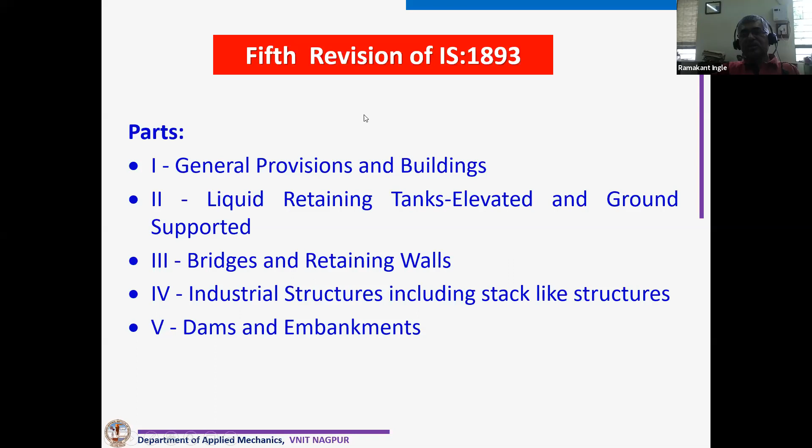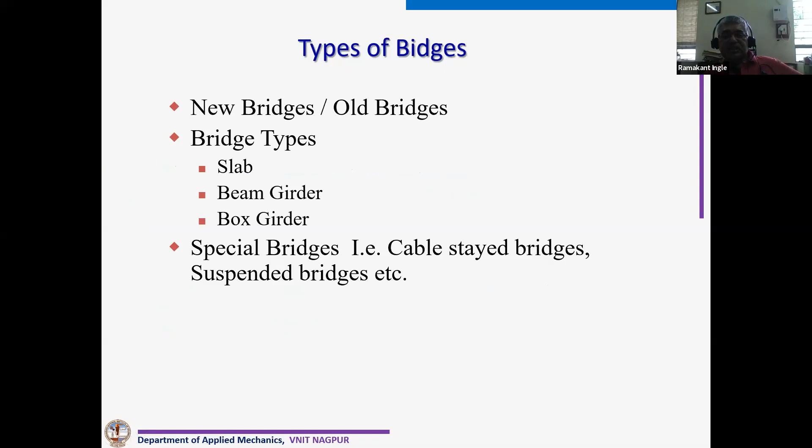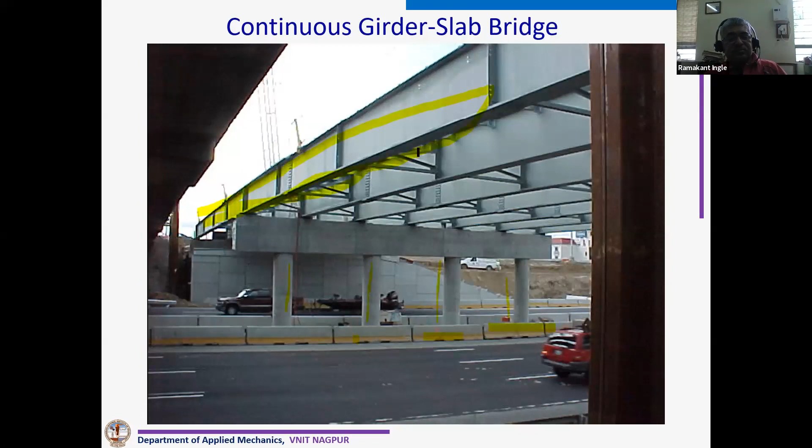Now you can see here also the girder is continuous. You can see here, continuous girder. Nowadays it is called an integral bridge also. The concept of an integral bridge is becoming more and more popular, because the more the indeterminacy, the better it is for earthquake resistance. You can see now here also, these are frames. The substructure is of frame type, and you can see the girder, they are continuous.

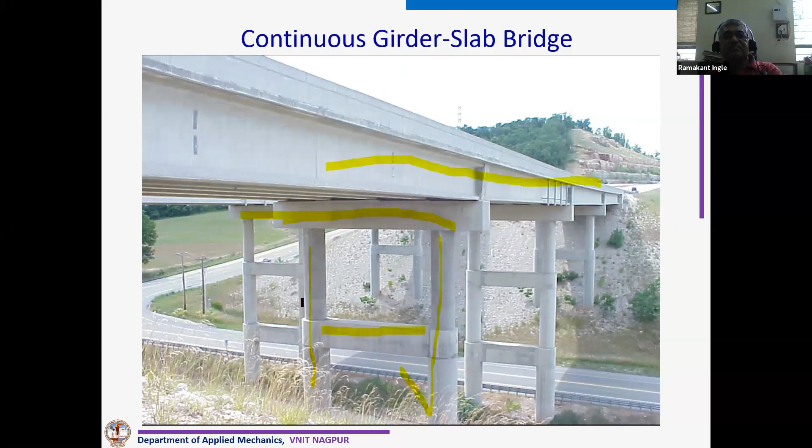Okay, you can see here. Now these are integral bridges. No bearings are required. Bearings, every 15-20 years, you have to replace them, and that itself is a big job. So now most of these developed countries, they are coming up with integral bridges, that is fully connected, rigid.

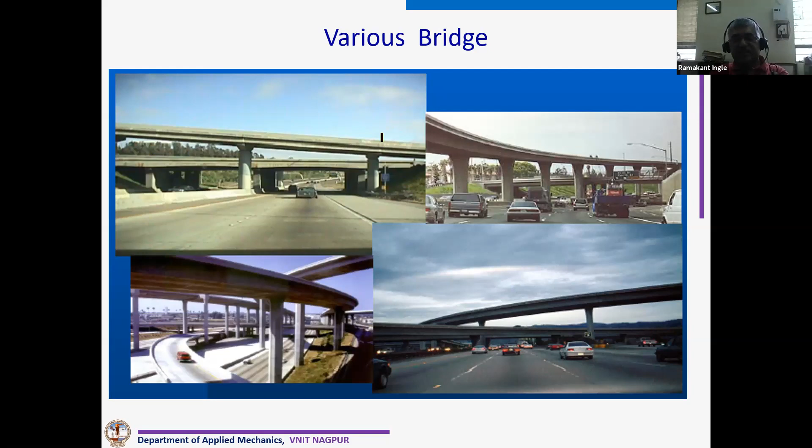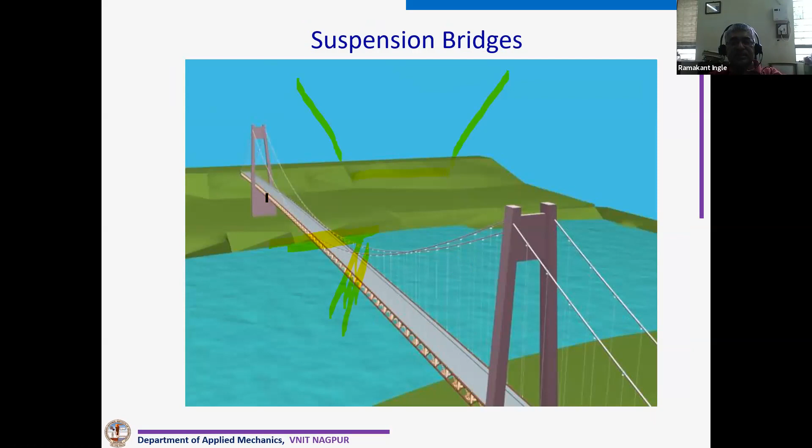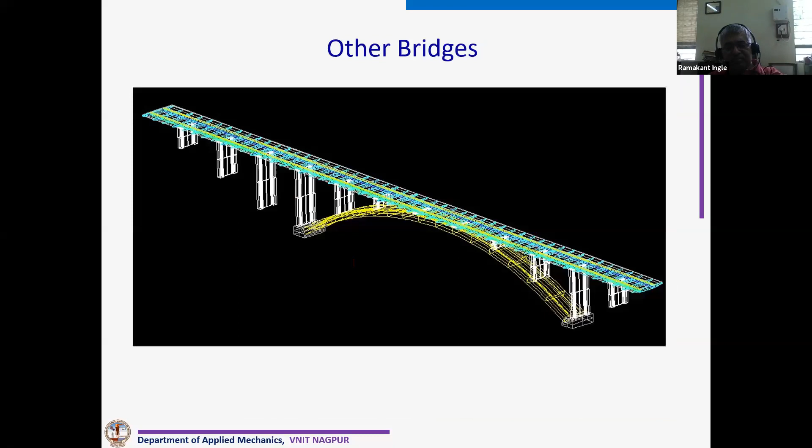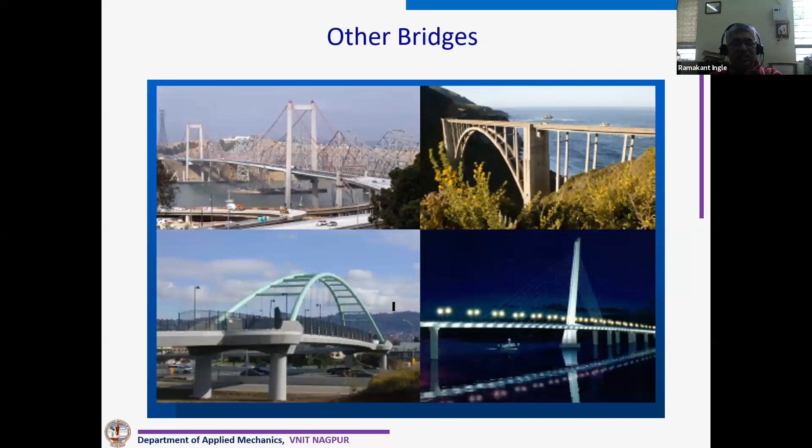This is another type of bridge. Again integral, and this is a FEM model of it. These are some other type, fancy type bridges. You can see here. It should look nice also. There should be a landmark in the city. And all these bridges.

Now, seismic analysis mainly demands 3D model of bridges. We can do dynamic analysis. We can go for elastic cracked section, even inelastic analysis also. In case of dynamic, we can go for response spectrum analysis as well as time history analysis. We have to combine various horizontal components, that is X and Y, as well as vertical components also.

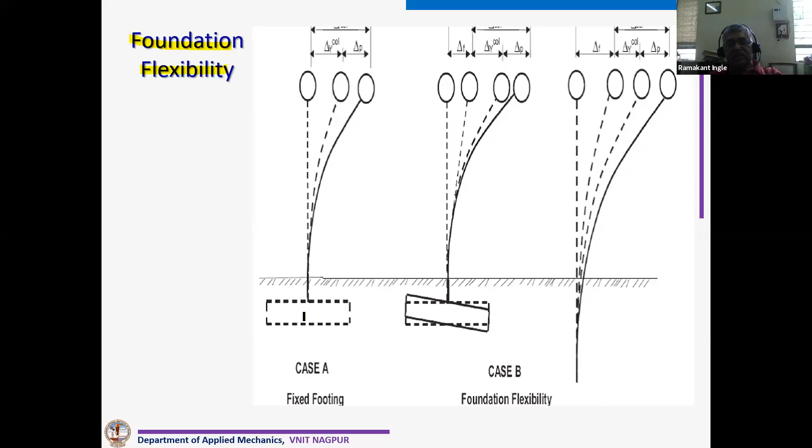You can see this, sky is the limit to prepare a mathematical model. In one model, what happens - we assume fixed base. And in another case, we can consider the flexibility of soil. You can see both results will be totally different.

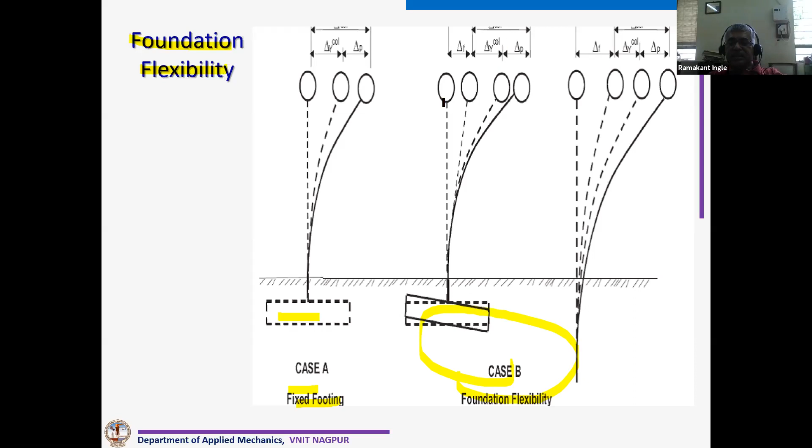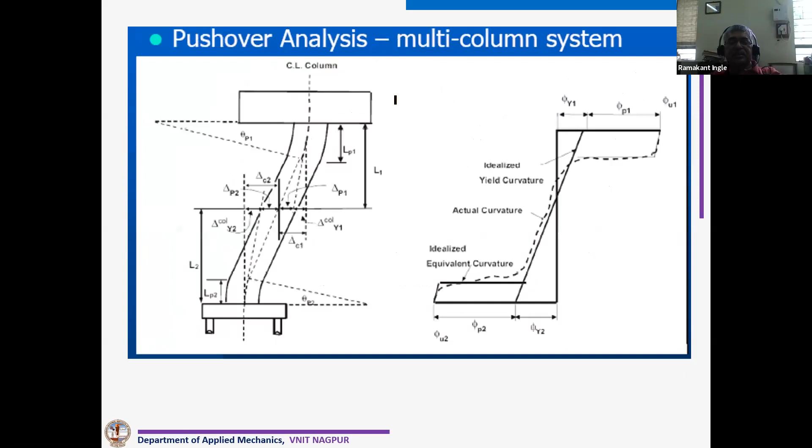Nowadays, this concept is coming up now - push-over analysis of bridges. So this means we are going for non-linear analysis. See, it is a push-over analysis for a cantilever type of bridge. This is for a portal type of bridge. The mathematical model shown using solid models.

See, this is a hollow pier. You can see this is a hollow pier. Then foundation, pile cap, then piles. You can see.

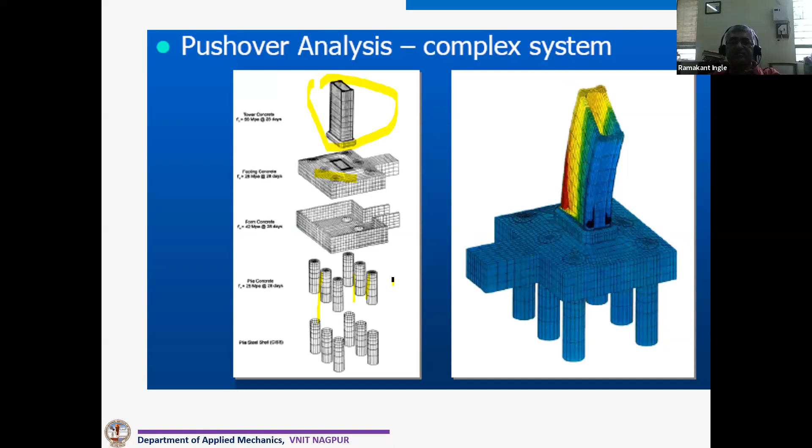Now, before going for this code, let's see what damage can occur to the bridge. You can see here, damage type - it can be brittle type, it can be ductile type. Brittle type means what? At this particular point, you will find there is a damage, and here also. Ductile you can see at this particular point.

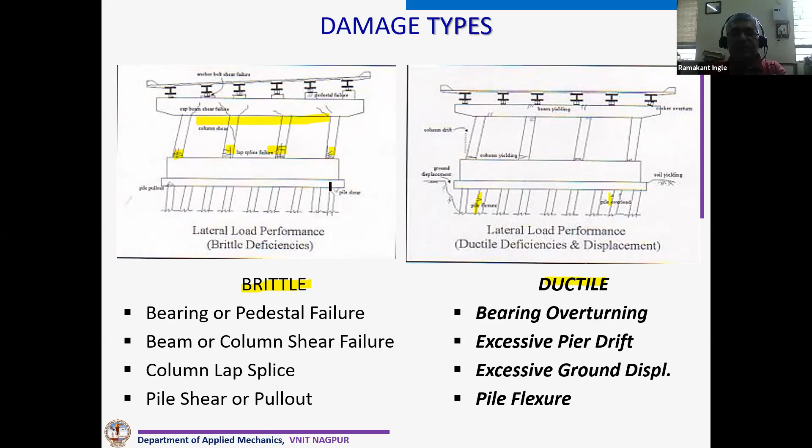You can see this is one bridge. Now this bridge damage has occurred because of fault. Then this is on the damage bridge. You can see the dislocation of this particular joint.

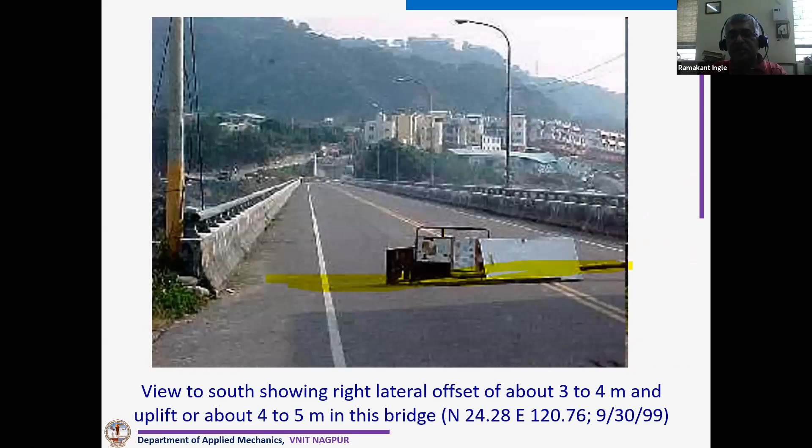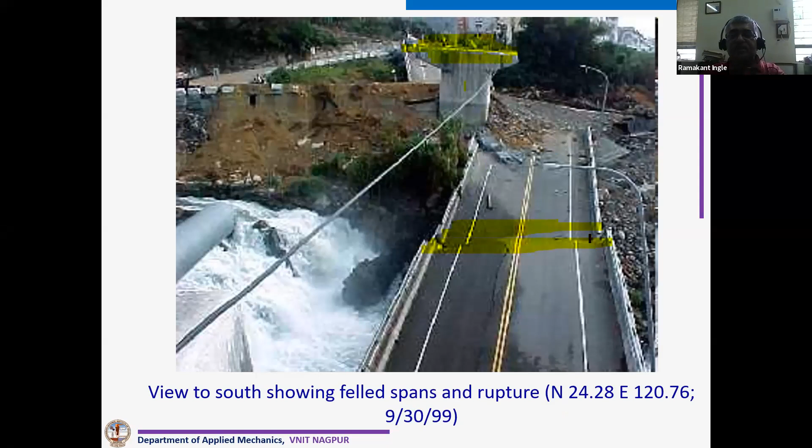Two span dislodged - no, not two span. See what happened, this was a superstructure, this is a pier cap. This has fallen down. You can see here, and it has cracked at this particular location. It is under view.

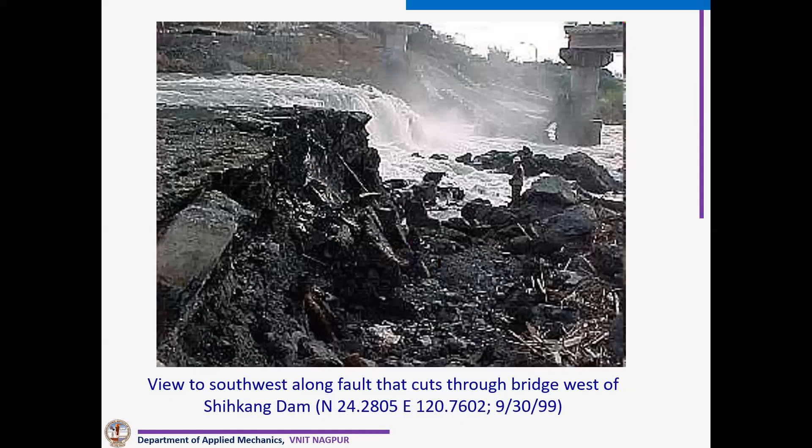You can see this also. A bridge has collapsed. See, here also you can see. Superstructure - see, it has not failed, it has dislodged.

You can see here also dislodging of the bridge. You can see here also. Dislodging, because what happens, this particular seating arrangement here was inadequate. So that's why when earthquake came in this direction like this, shaking, it moved like this. Since this particular seating was less, it has collapsed.

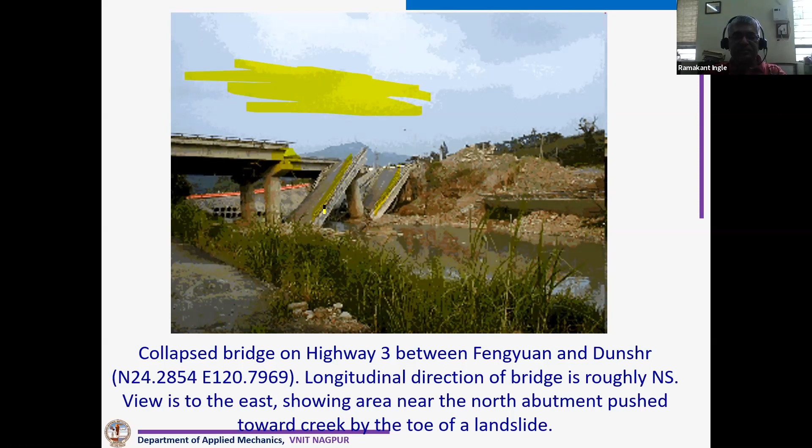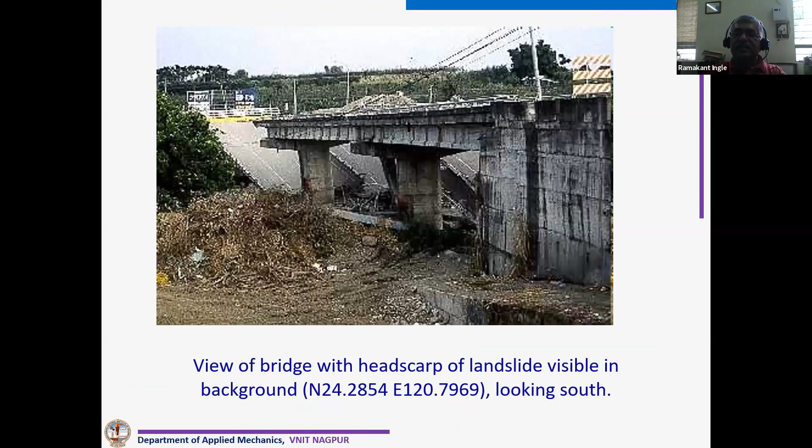You can see same thing here - seating was inadequate here also. You can see here also. So majority of bridges, they fail because of inadequate seating. Only a few, they fail because of substructure failure.

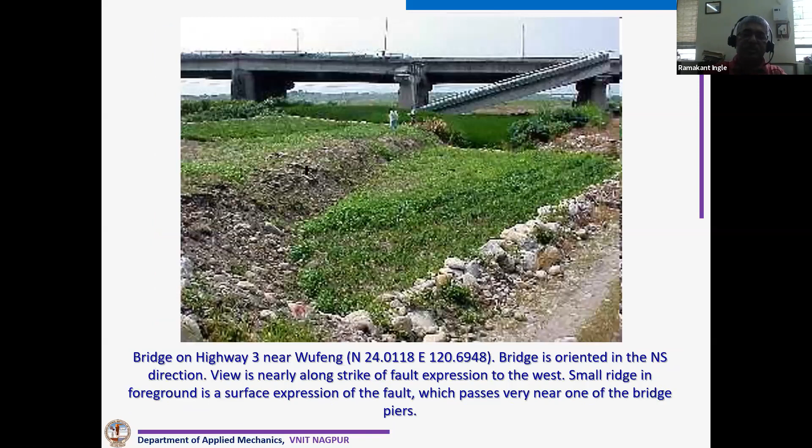You can see here now, it has tilted, maybe because of soil movement. You can see here. See what happened here - height was less, horizontal force might have got developed in this particular pier, so it has sheared off like this.

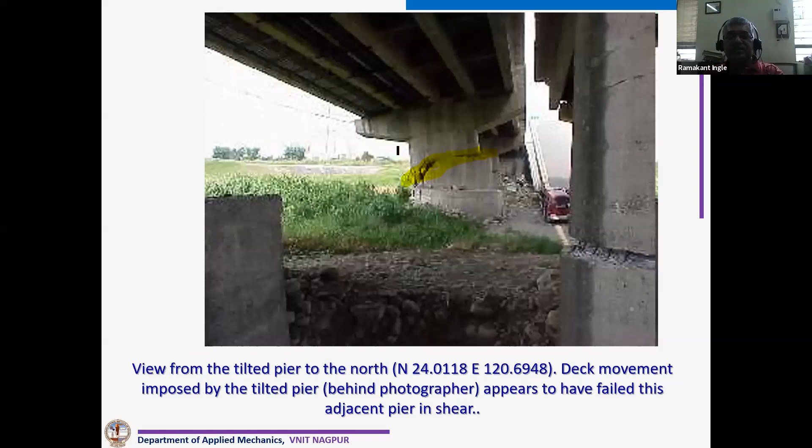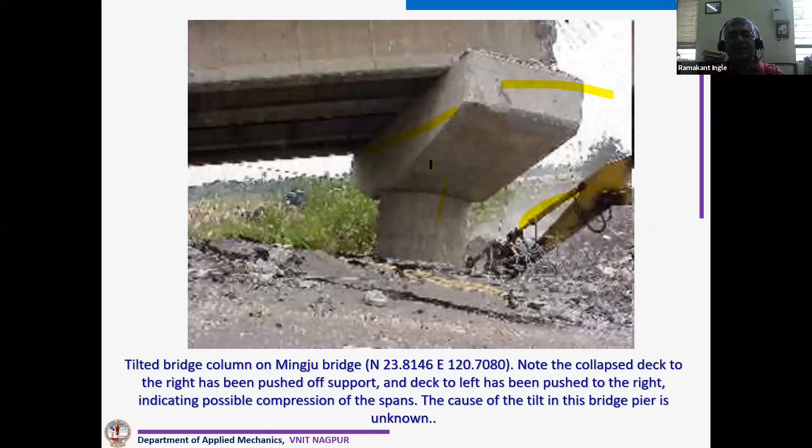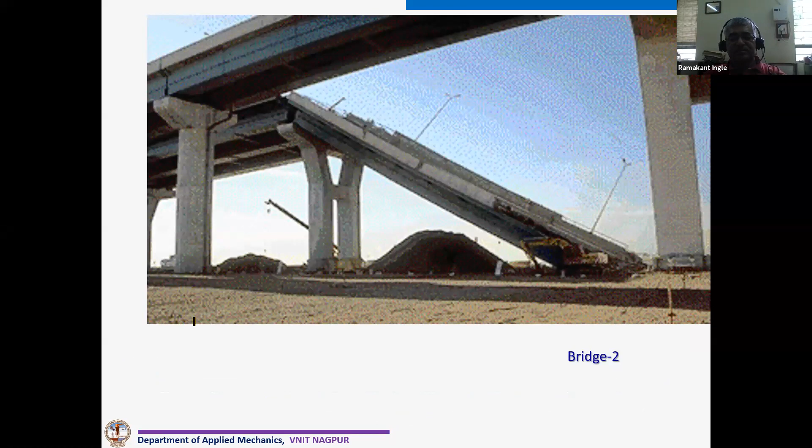You can see here again inadequate seating. See, majority of failures there because of inadequate seating and non-ductile reinforcement, placing of non-ductile reinforcement. You can see here also, nothing has happened to this. Now you can see this is a double decker. You can see this particular slab, the bottom one, has collapsed on this bridge. But still this particular bridge, you can see the top one, it is still intact.

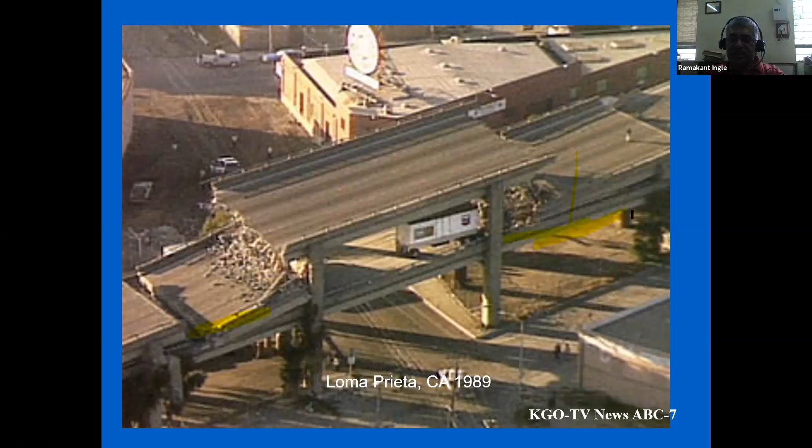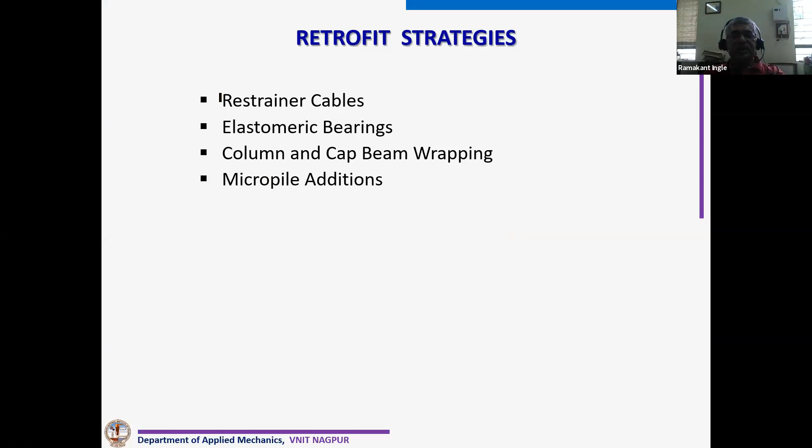There are different retrofit strategies which can be used, such as restrainer cables, elastomeric bearings, column and beam wrapping using steel fiber or carbon wrapping, and micropiles if we need to improve soil properties.

After these failures, let us try to understand what IS 1893 Part 3 is. It covers bridges and retaining walls, and gives the definition of regular bridge as well as irregular bridge.

What does a regular bridge mean? There should be no abrupt or unusual change in stiffness, mass, or geometry along the span. A bridge shall be considered regular if it is straight, the adjacent piers do not differ in stiffness by more than 25%, the spans are less than 120 meters, and the pier height is less than 30 meters.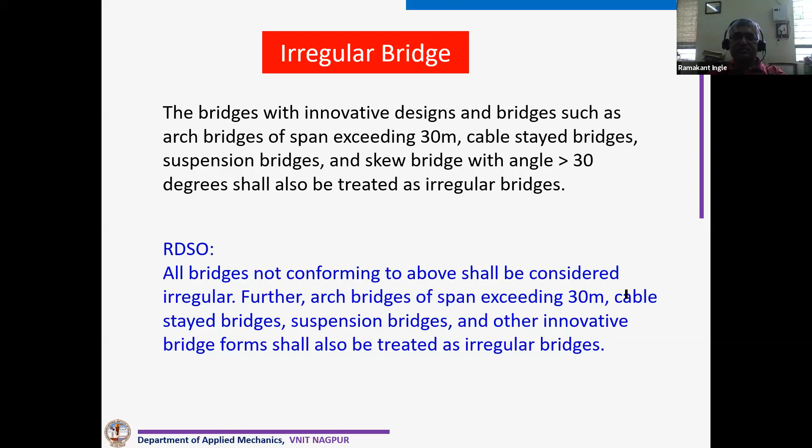This is the irregular bridge. If we cannot qualify a bridge as regular, it will be called irregular. So all other types of bridges are irregular. We have to define our bridges as regular or irregular because based on that, our analysis methodology is decided.

There can be components like superstructure, substructure, bearing, and foundation. Masonry and plain arch bridges which span more than 10 meters are not recommended in zone 4 and 5.

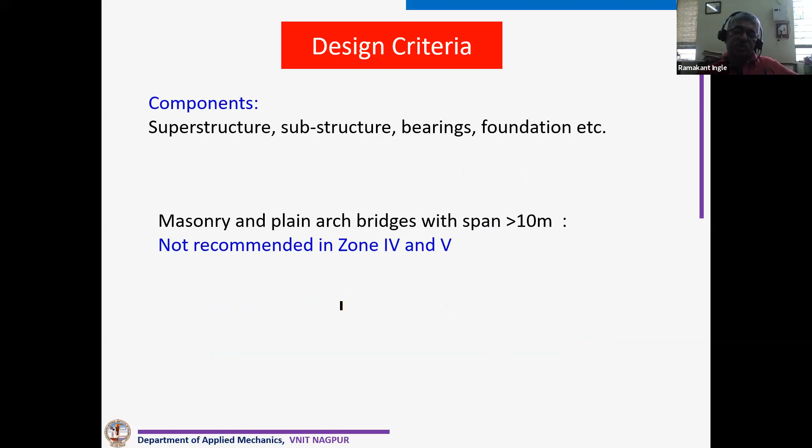We can use site specific spectra also. We can go for elastomeric bearing, but with the condition that our R value will be 1 for design of foundation, as you can see.

Bearing shall be tested for cyclic loading.

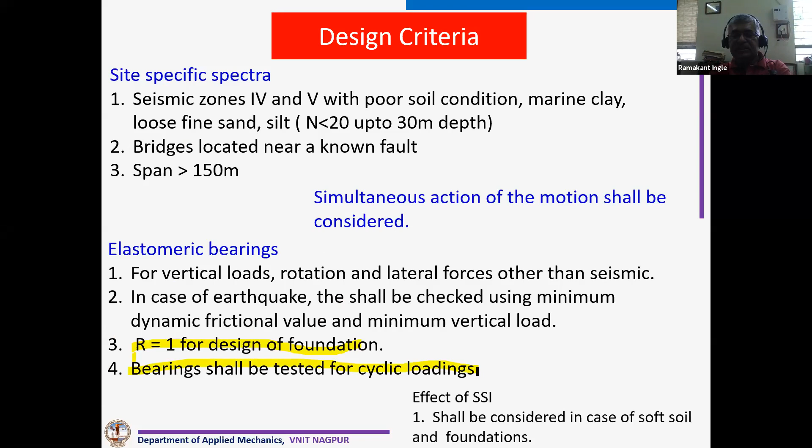Then there is interlinking of bridges. Why this interlinking? Because if you do interlinking, the dislodging of superstructure that has occurred can be avoided. Even nowadays there is a growing demand to go for deck continuity bridges.

What do deck continuity bridges mean? Decks are continuous and the beams below are simply supported. Because decks are continuous, we can avoid at least the part which requires regular maintenance, that is expansion joints, but we cannot avoid bearings, because it is simply supported.

So that is also coming up nowadays, and more so integral bridges are taking advantage now in case of seismic analysis. Capacity design is allowed for bridges in seismic zone 3 and above, especially for substructure.

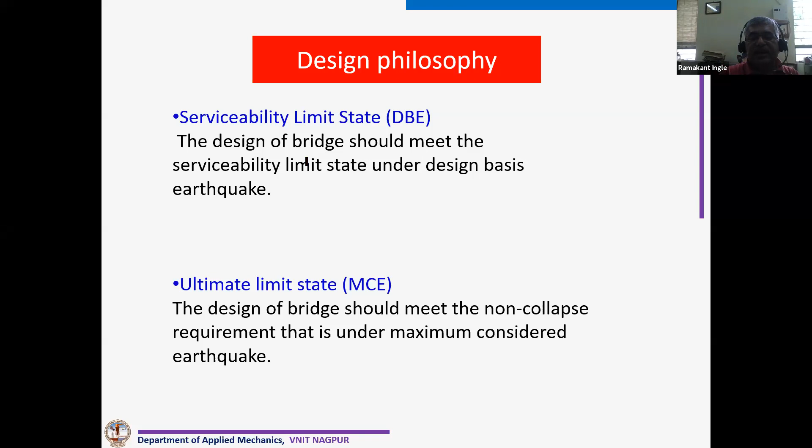This is on the assumptions while doing the earthquake analysis. See one thing here: this is the main assumption. Seismic forces on live load shall not be considered in the longitudinal direction.

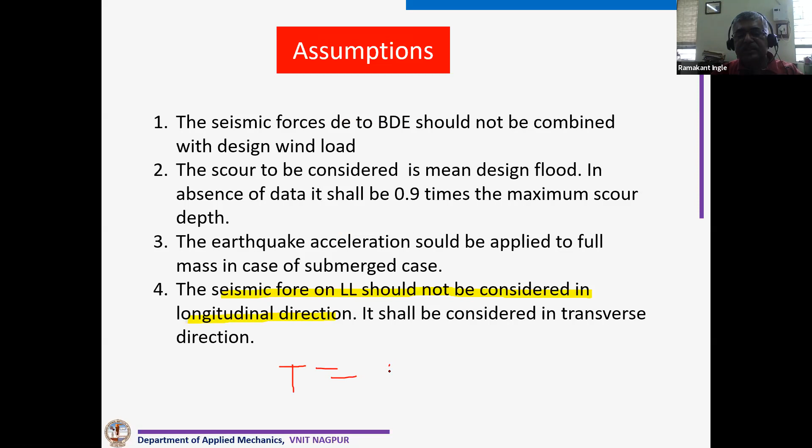That means, generally, we calculate the time period assuming it is a single degree of freedom system, and that is calculated by this particular expression: time period is equal to 2 pi root of m by k. Now, while evaluating this mass, the code says we can ignore the live load in the longitudinal direction.

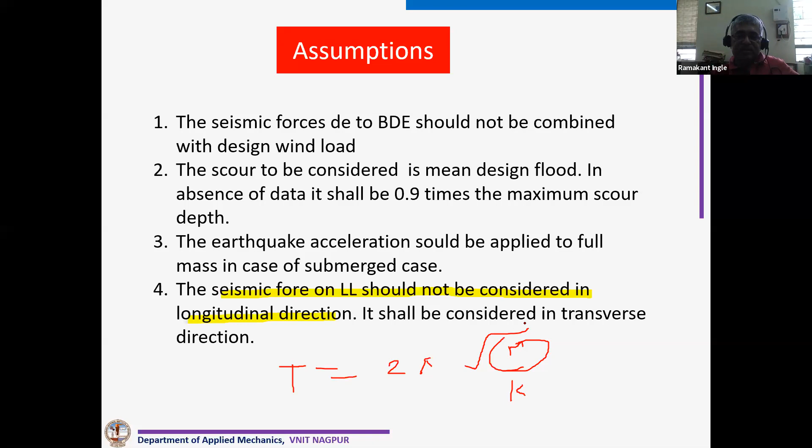But when we do earthquake analysis in the transverse direction, we have to take some part of the live load. We calculate seismic force as per that seismic weight, which is the weight of the superstructure, and some part of the substructure also we have to take, and live load is taken as 20%.

But it is 0% for rural roads and 30% for rail bridges. For road bridges we take live load in seismic weight calculation in the transverse direction as 20%, 0% for rural bridges, and 30% for rail bridges.

Even RDSO gives a similar provision, but it says 50% of live load. Even vertical seismic force shall also be calculated with 50% of live load.

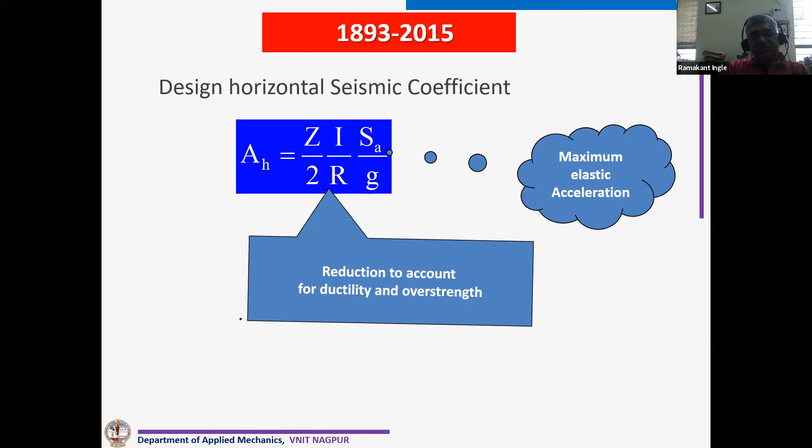Now we calculate seismic force, seismic acceleration using this expression: AH is equal to Z by 2, I by R, SA by G, where Z is seismic zone factor, I is importance factor, R is response reduction factor, and SA by G depends on the time period. So this is for different zones, we have different Z values.

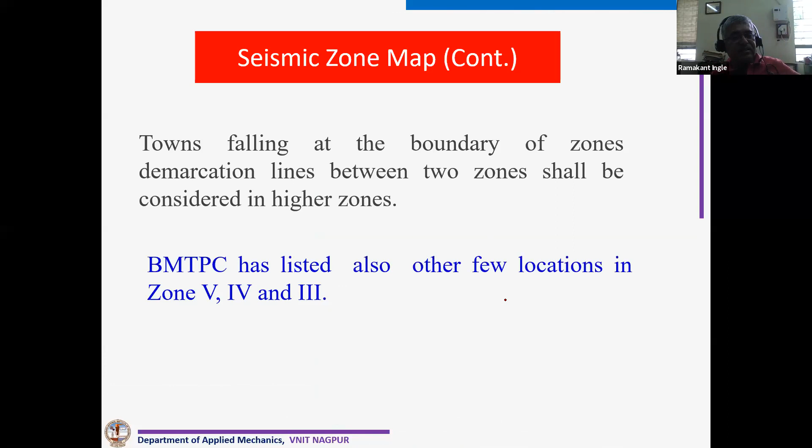At the boundary, we have to take the higher zone, but sometimes it is still very difficult to locate our bridge on the zone map. So BMTPC has given direct locations. You can see, I'm just putting it for Maharashtra now.

Zone 4 includes Kolhapur, Pune, Raigad, Ratnagiri, Sangli and Satara. Then Chandrapur, Gadchiroli, Mumbai, Thane, Yavatmal, Ahmednagar, Akola, Amravati, Aurangabad come under Zone 3, and others fall in Zone 2.

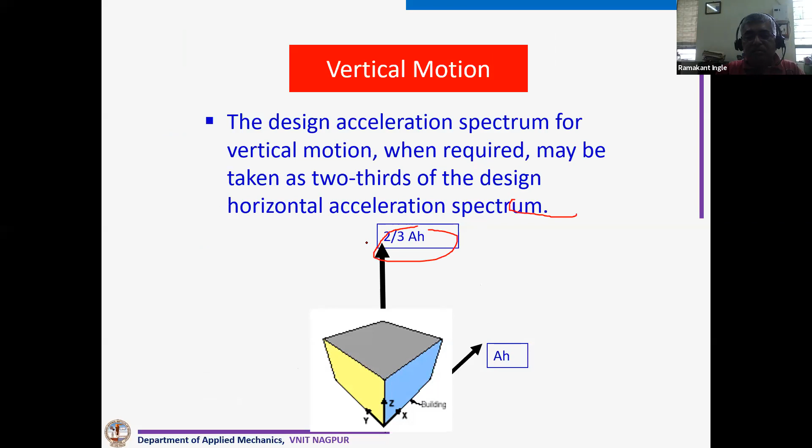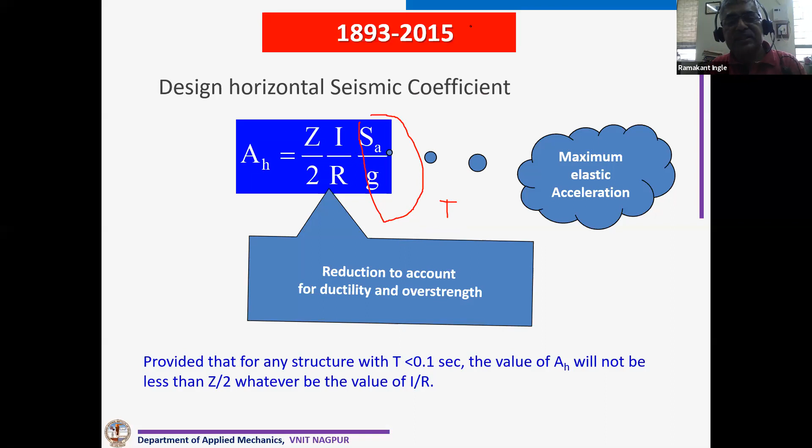For seismic action in the vertical direction, the code recommends taking two-thirds of the horizontal AH. But this AH is based on time period. While calculating AH for the vertical direction, it should be taken as zero because the vertical direction time period is always close to rigid action. So we have to make sure of that.

Then we have to combine the earthquake forces also. We calculate earthquake force in the longitudinal direction, in the transverse direction, and in the vertical direction, and then the responses are combined.

Now I will give an example of how to combine it. Let's say this is a pier, and at this particular point we have to do the design. Here we get forces because of dead load, SIDL, live load, and earthquake. Now suppose earthquake forces are obtained in the longitudinal direction, transverse direction, and vertical direction. Now, how to combine them?

Let's say we are interested in calculating the moment Mx here. So what we normally do: these load factors are given by IRC or IRS codes. But how to combine these earthquake forces? We take the major direction earthquake first, 100% of Mx when earthquake is in the X direction, plus 30% of Mx when earthquake is in the Y direction. Then a second time we reverse it: 30% of Mx because of X direction earthquake, and 100% of Mx because of transverse direction earthquake.

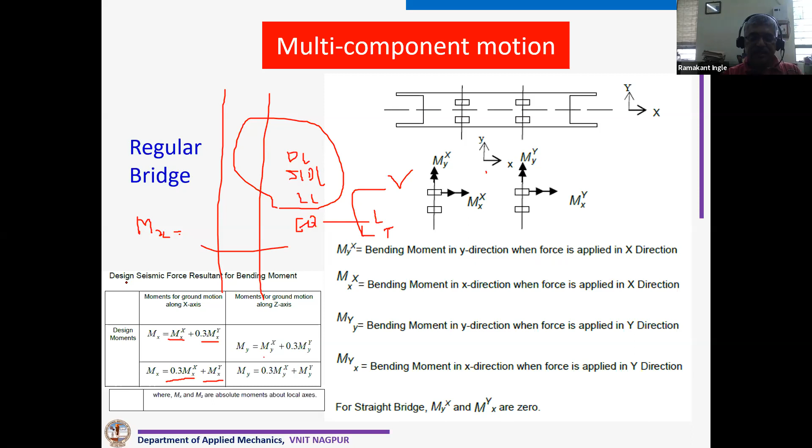So this is for Mx. The same thing has to be done for vertical loads, horizontal shears, and other moments also. So like that we have to combine all these moment responses. Even for regular bridges, we have to take all three components: X direction, Y direction, and Z direction.

This is our spectra, as given. This is our simple pier, foundation, mass, and we get the time period from this. Sometimes it is better to model differently because every time you will not get a uniform pier. There is a possibility it is a step pier like this, a tapered pier like this, or sometimes piers are like this also.

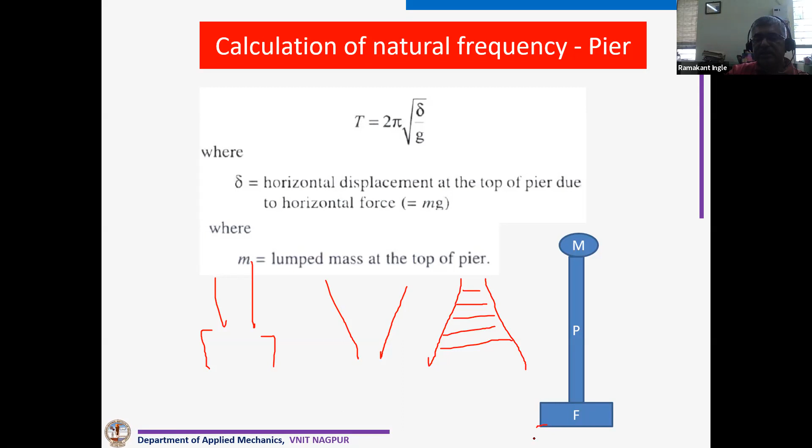So you can do this in a simple computer program also, making a mathematical model and lumping the mass at the top. Divide the column also into a number of small elements, so that its self mass is taken automatically by the software, and you do the analysis. Even in this case, it is very easy to take foundation flexibility also into account. So it is not that every time we should go for a very simple mathematical model.

Even we have to do earthquake analysis in the vertical direction. You can see now, this is a frequency in the vertical direction. It is generally recommended now in Eurocode that this frequency has to be more than 100 by span, where span is in meters. For example, if our span is 30 meters, whatever frequency we are calculating for this beam in the vertical direction, it should be more than 100 by span, that is 3.33 hertz. Otherwise, the code suggests that we have to go for detailed dynamic analysis; we cannot go for simple static analysis.

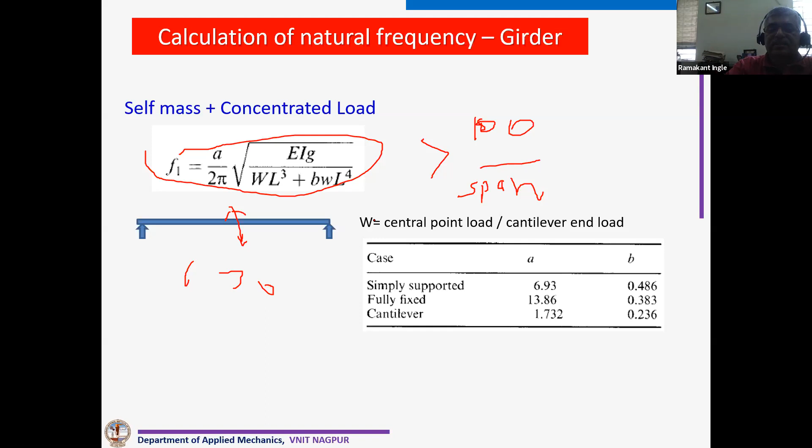These are the formulas given for calculation of frequency. A very simple formula: it is 18 by root delta, where delta is in mm. This is when W is zero. Now in this case we can have anything, even a fixed beam also, or a propped cantilever also. We just have to calculate displacement in mm. 18 by root of that displacement gives the frequency.

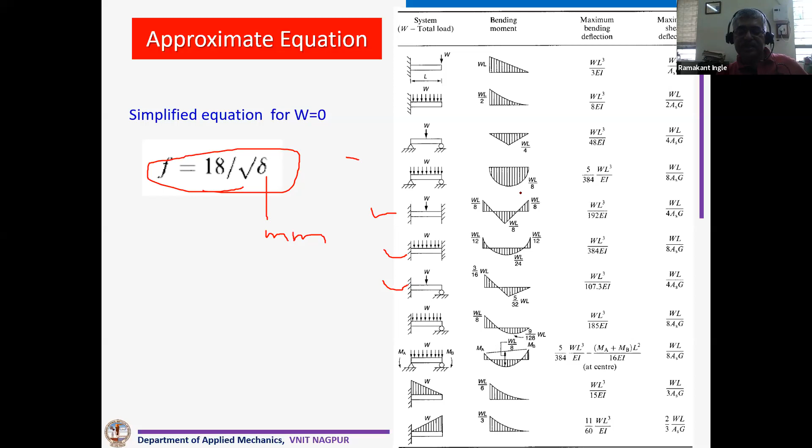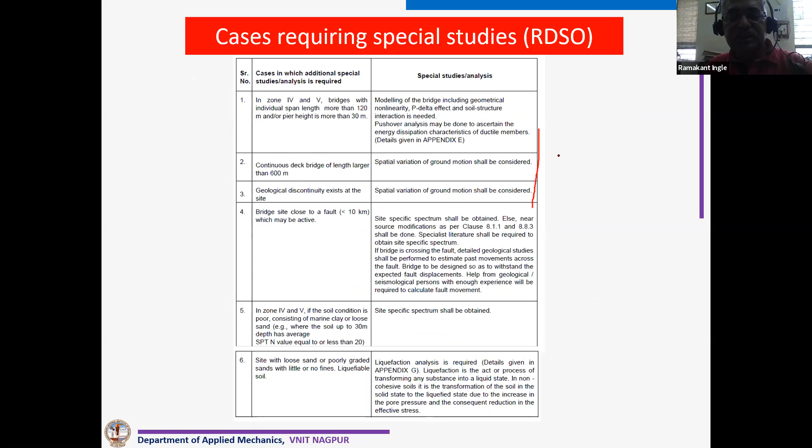In case we have to use maximum credible earthquake, then we have to go for nonlinear analysis or time history analysis, even for regular bridges also. So even RDSO has given, depending on the zone, how to perform the analysis. Everything is given, I will not go into detail of this one. Even they have given what is seismically preferred and what is seismically non-preferred also.

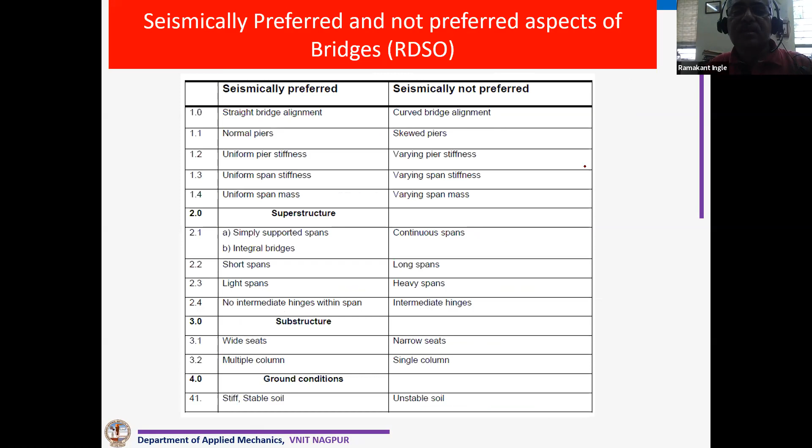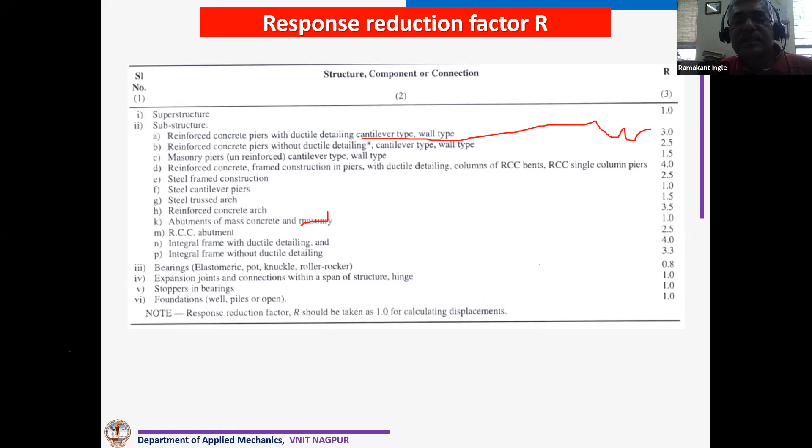This is response reduction factor, given in IS 1893 part 3, depending on cases. Now you can see here a cantilever beam, a cantilever type, wall type - R factor is 3. Just see here, integral bridges with ductile detailing - R factor is 4. That means we are designing our structure for one third less earthquake force, 25% less earthquake force.

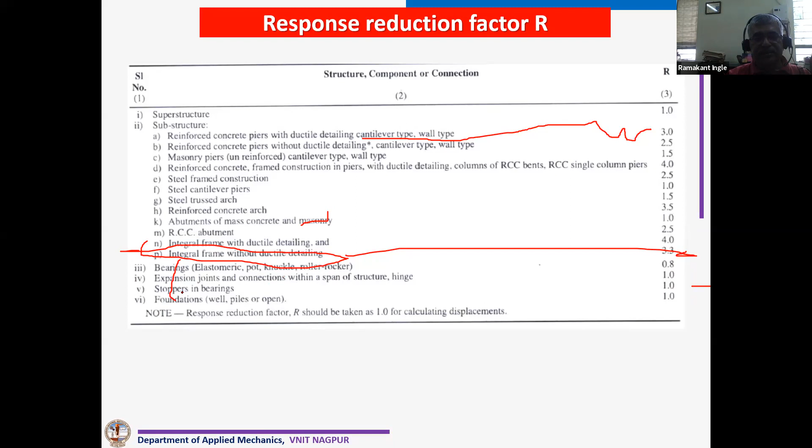But you can see how we have to design the bearings - for bearing R factor is 0.8. For design of stopper, R factor is 1. For designing foundation, R factor is 1. For designing expansion joints, connection within span, R is equal to 1. So we have to keep in mind all these things. For superstructure, R is equal to 1. Only for substructure where ductile detailing can be provided, we say that R will be more than 1. This is response reduction factor given for RDSO bridges.

You can see here masonry or PCC piers - it is very less, as compared to RCC column with ductile detailing as well. Without ductile detailing it is 2.5. So that's why it is always better to go for ductile detailing, so that our response reduction factor is high and we can reduce - we are designing for less earthquake forces because this ductility can absorb more earthquake forces. For connection and stopper, again R value we have to take as 1.

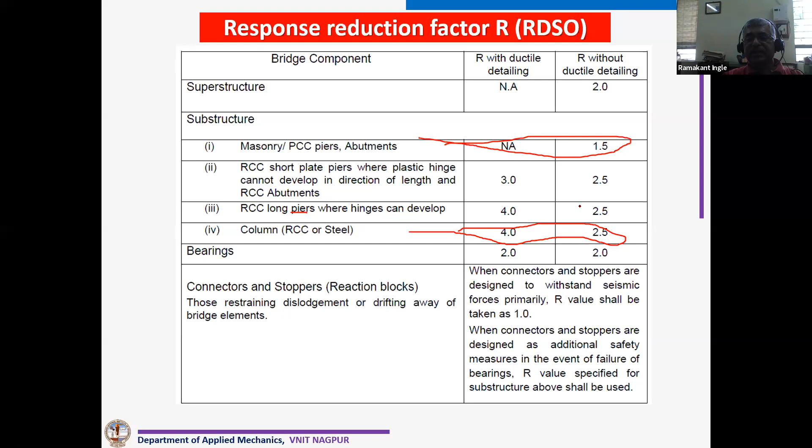But there is another thing about soft soil - no permissible increase is allowed in case of soft strata. Soft strata means where N is less than 10, and clay type of soils.

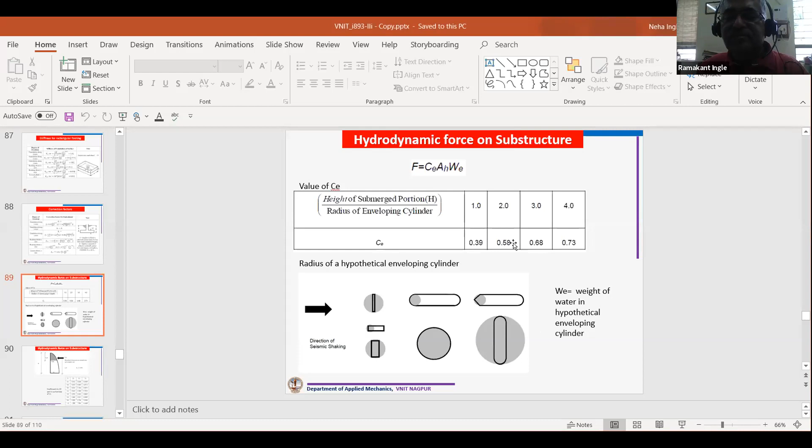See, soil structure interaction, generally it is done.

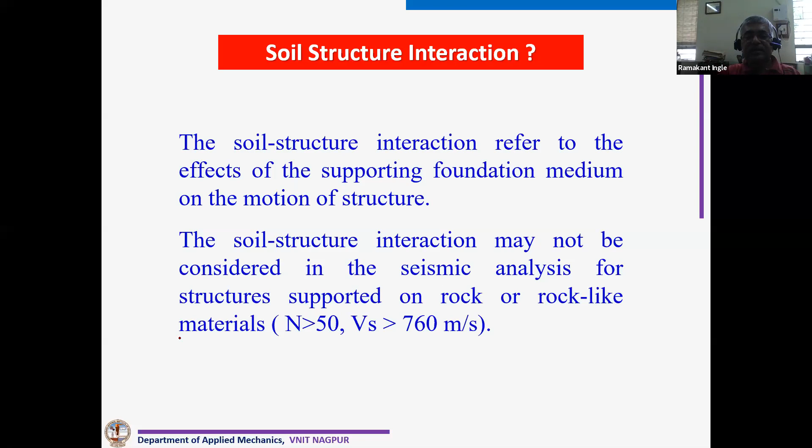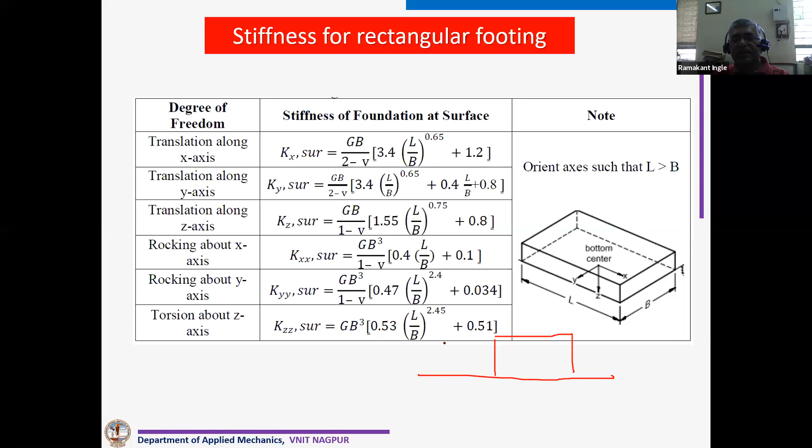But most of the times our foundation is embedded, so even correction is also given for that. So this all formulation is given in our IS 1893.

This is the formula given for calculation of hydrodynamic force. It depends on height of submerged portion of pier divided by radius of enveloping cylinder, and that radius of enveloping cylinder is based on orientation of pier as well as direction of flow. Based on that, using this expression, we can calculate Ce.

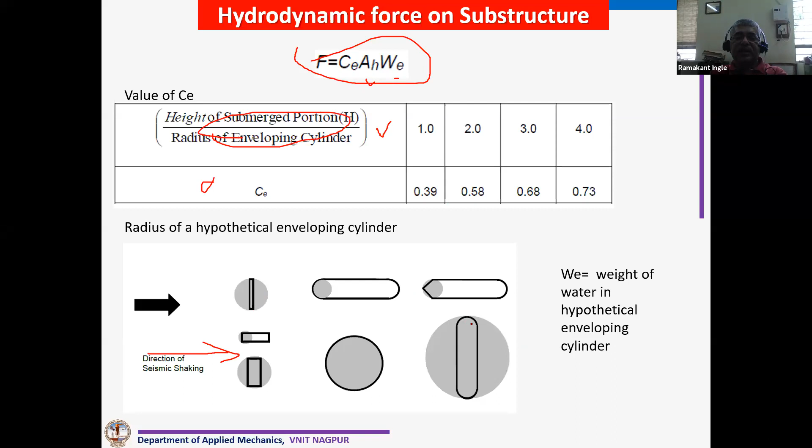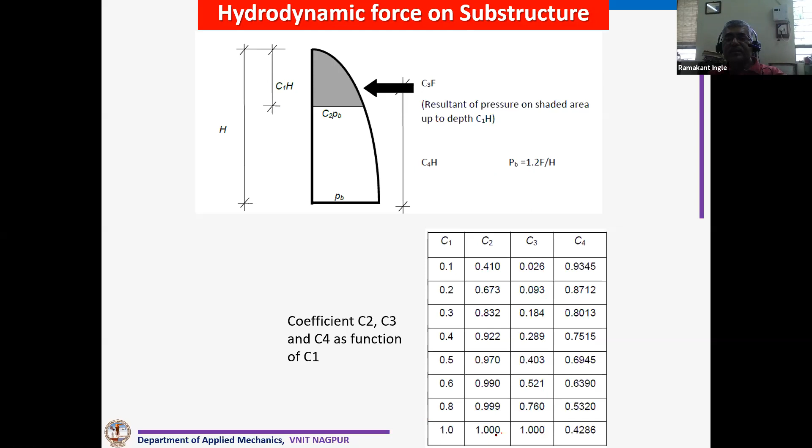Once Ce is known, Ah we have already calculated, and We is weight of water in this particular hypothetical cylinder of radius of enveloping cylinder. Then in vertical direction also, this distribution we can calculate like this. But here we have to assume any one set and try to calculate by that.

This is for submersible bridges.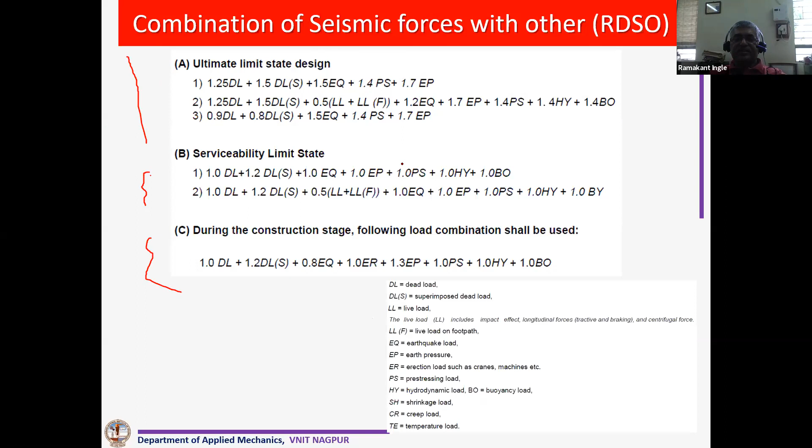Now you can see this is very important. Why has the majority of bridges failed? Because of dislodging, because this particular seating was inadequate. So you can see now the code has given this seating.

You can see this seating for, let's say, zone 3. It is 203 mm plus 1.67 multiplied by span, span in meter, plus 6.66 into height of pier, that also in meter. Everything will get in mm.

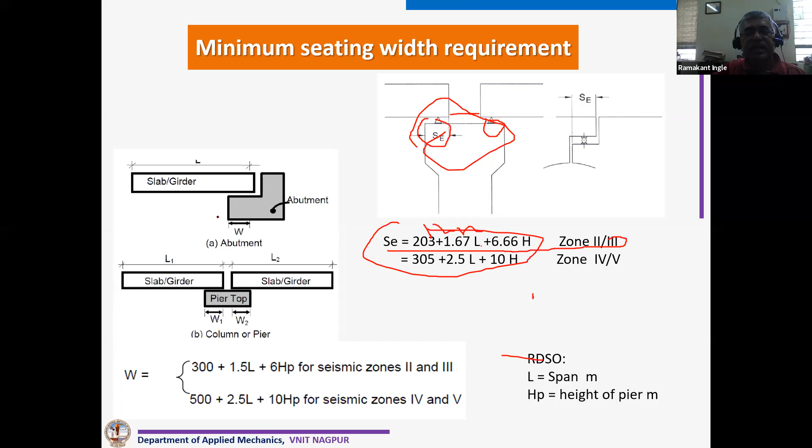This particular SE is here, same SE will be here, and this whatever we need, so our seating has to be that much now. You can see this W. This is a minimum requirement, we can provide more than that.

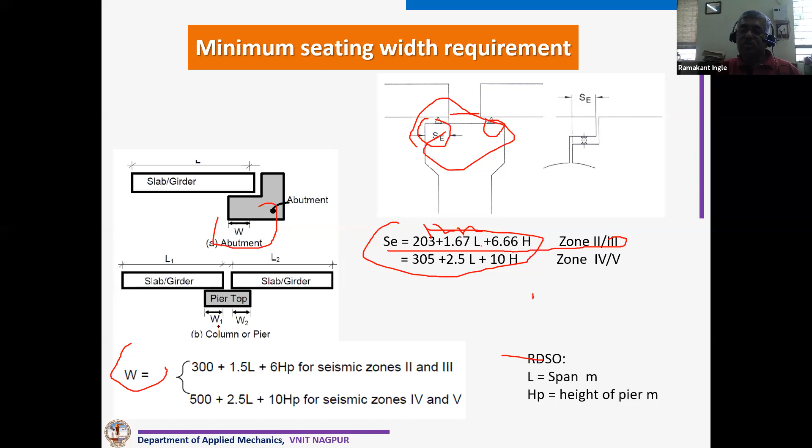Bearings can be of different types. While evaluating earthquake forces to design the bearing, we have to make sure that we are taking R equal to 1.

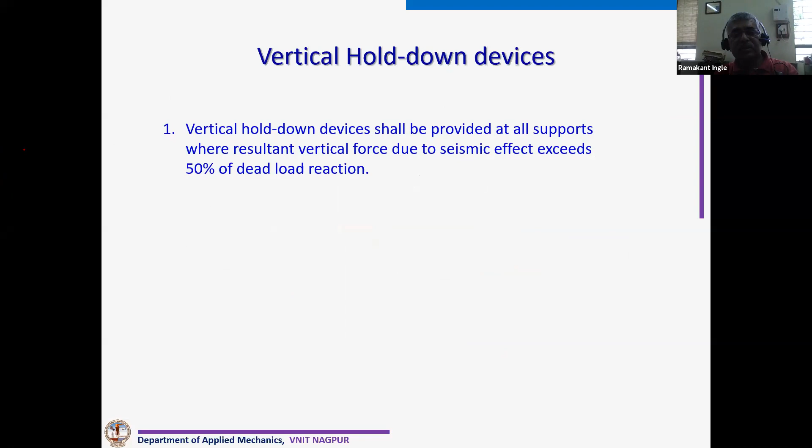There are other types of vertical hold-down devices, and anti-dislodging elements also, as you can see here. If seating is not possible, mechanical devices are provided. It is connected to pier, and here it is connected to bottom of superstructure.

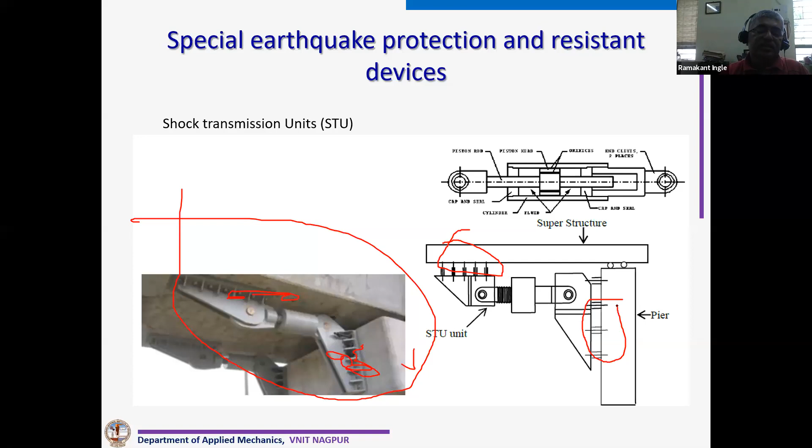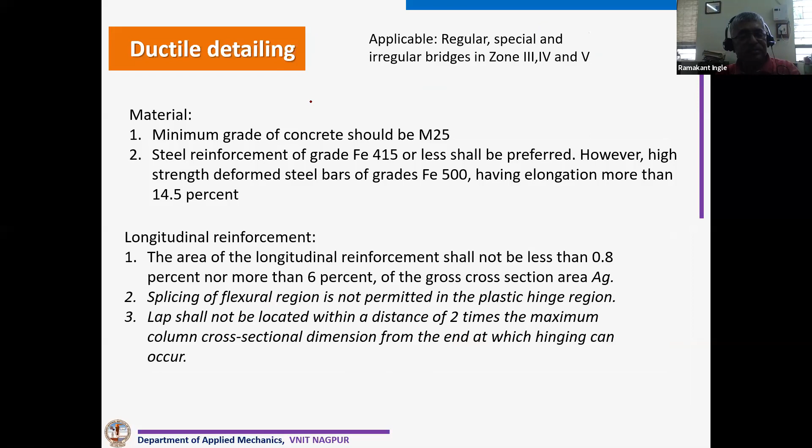Then ductile detailing - we have seen few failures because of ductile detailing also. I will directly come to that formulation. Depending on whether it is a circular or rectangular cross section of pier, we have two different formulations given.

This is the spacing up to what we have to provide, that is L0 distance. L0 distance means what happens - this is a point where maximum... our plastic hinge can occur here. Just one second.

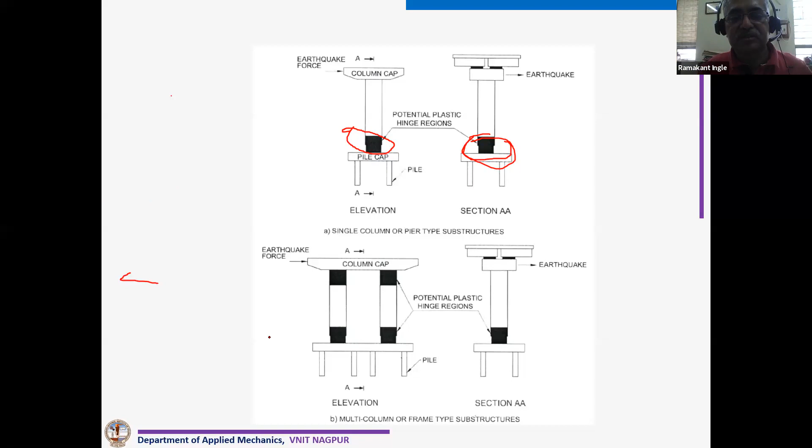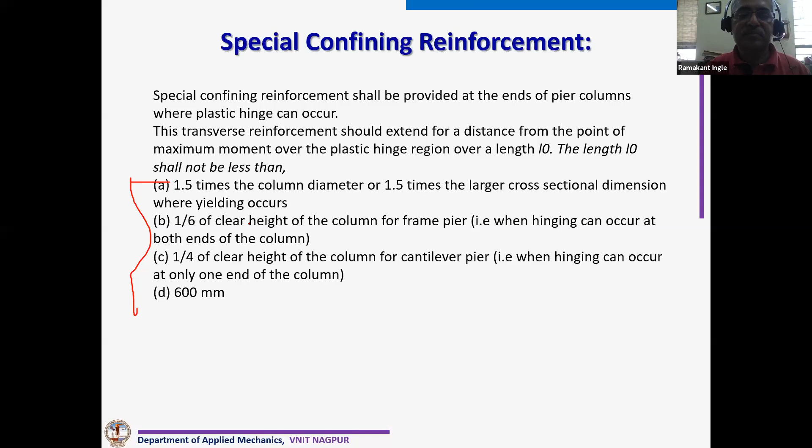These are the points where plastic hinge can occur, so that's why we have to provide confining reinforcement in this particular zone. In case of portal, it is at the top and bottom here. This distance is given as 1.5 times column diameter or 1.5 times larger cross dimension, 1/6 clear height of the column, 1/4 clear height of the column for cantilever pier, and so on. Minimum is 600 mm.

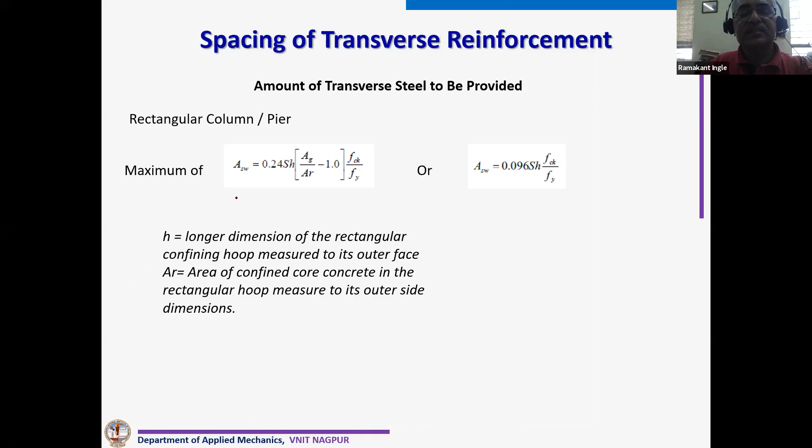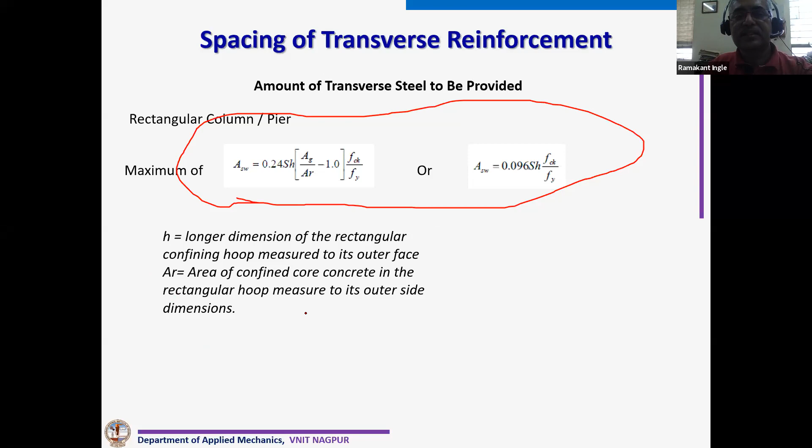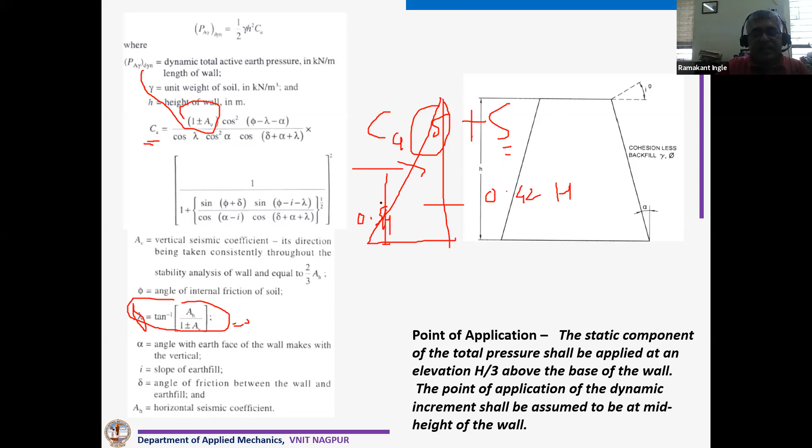And this is given for surcharge also, with saturated soil, clay and all these things. This is what is given in IS 1893 Part 3, which is basically only for bridges. I try to add whatever is given by the railway bridge code also, by RDSO, because whenever it is a railway bridge we are supposed to use RDSO guidelines for seismic, and whenever using road over bridges or road bridges, we can use 1893. Even some clauses are given in IRC 6 also, for road bridges.